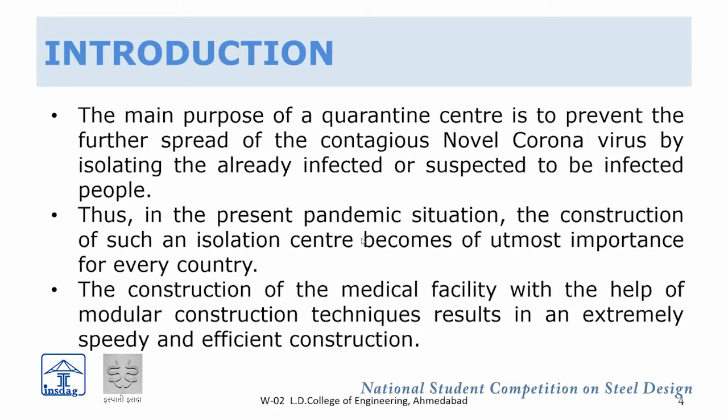As we know, the theme of this competition was given keeping in mind the pandemic that hit the world hard last year, which not only disrupted but took away the lives of lakhs of people throughout the world and brought the whole world to a complete shutdown for months. This urged all nations worldwide to design and construct quarantine as well as isolation centers in the least time possible, to prevent further spread of the novel coronavirus and to treat and isolate patients. Also, the construction of such medical facilities with modular construction practices helps in achieving construction speedily and rapidly.

The general requirements as per the guidelines issued to us by INSDAG were as follows: the location of the medical facility was to be at Kolkata, West Bengal, and the area of the facility was 50 meters by 35 meters.

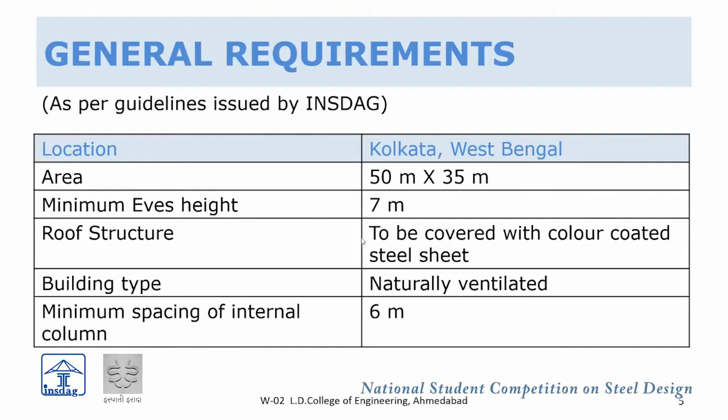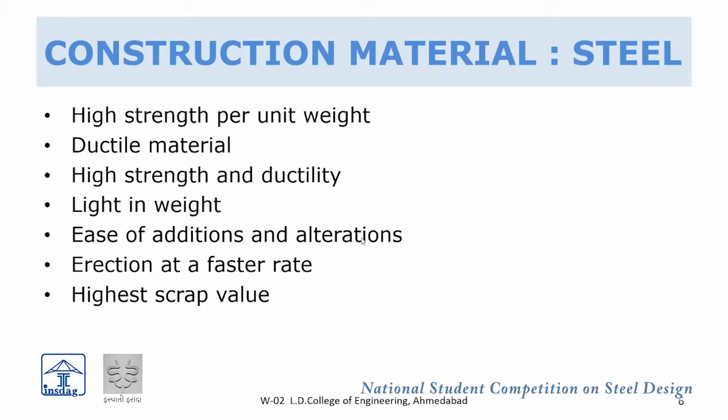As we know, steel can be advantageously used as a structural material because it has high strength for its unit weight, so even smaller sections with little self weight can resist heavy structural loads. Being a ductile material, its failure does not take place suddenly. The steel members being tough, they have high strength and high ductility. They are light in weight, so transportation, handling, and erection is easy, and additions and alterations can also be made easily. The steel also has the highest scrap value.

Prefabricated construction is a practice of assembling various components of a structure at the manufacturing site and then transporting those sub-assemblies to the construction job site. This helps in rapid and speedy construction because it eliminates on-site weather factors, contractor scheduling delays, as well as allowing faster fabrication since multiple fabricated structures can be produced simultaneously.

So now the further portion will be taken by Kishan Tripathi. Over to you, Kishan.

So we have used portal frames in our structure. They are commonly used in steel constructions, and we have designed it for the gravity loads and the lateral loads according to the Indian standards.

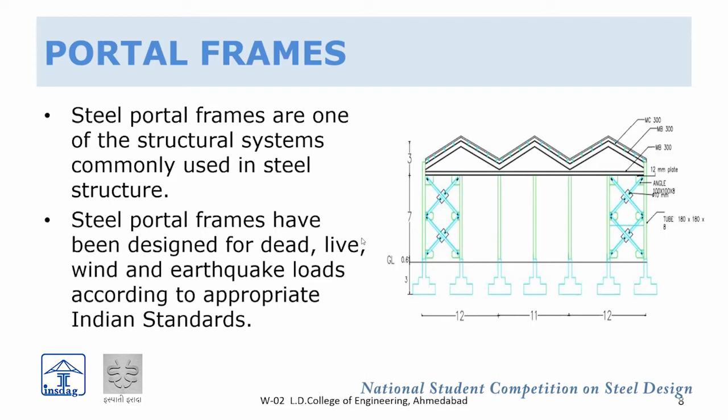The material we have used is E250B according to section 12 of IS 800 2007, and the sections used for the corresponding members are box sections for the columns, I sections, channel sections, and angle sections, with dimensions and codal provisions as follows.

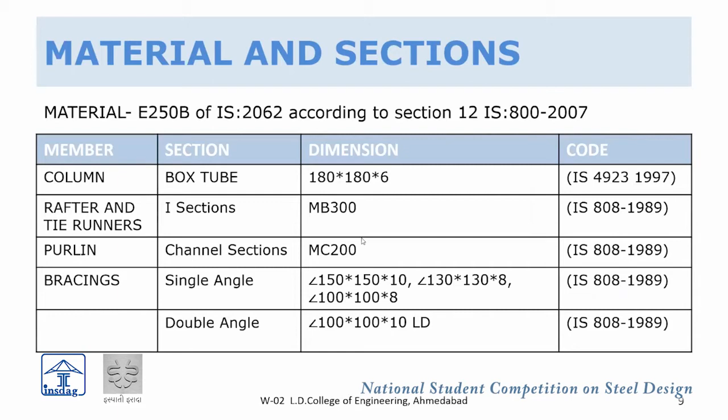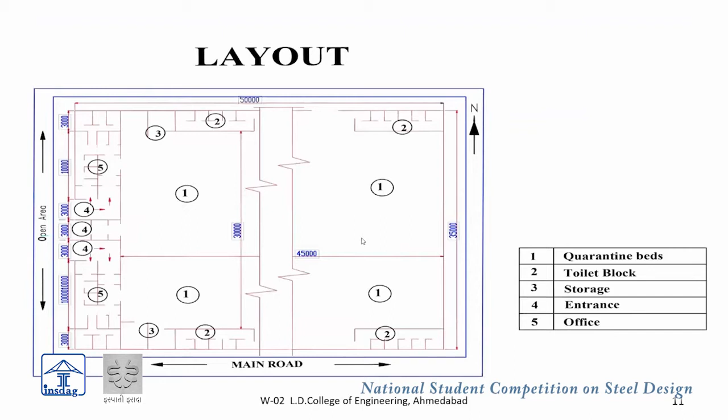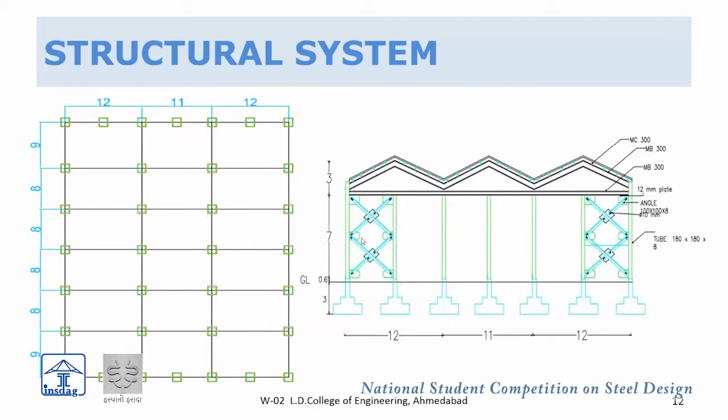So the proposed plan and structural system. This was the layout plan that INSDAG provided us, on which we had to provide our structural design, consisting of the quarantine area, toilet block, storage, entrance, and offices. On the left hand side is the layout of our column locations and spacings, and on the right hand side is the elevation showing the height and bracing systems of our structure.

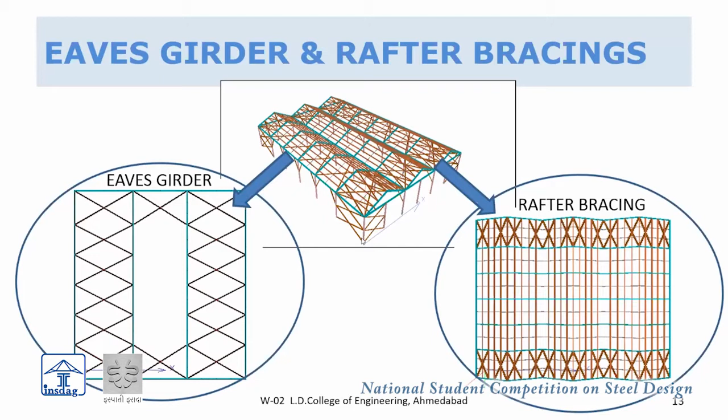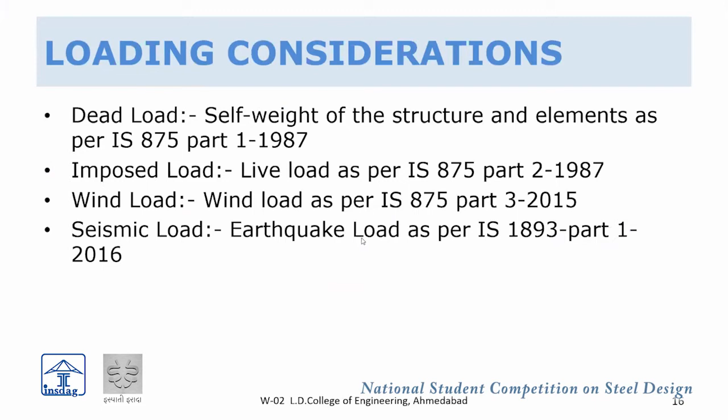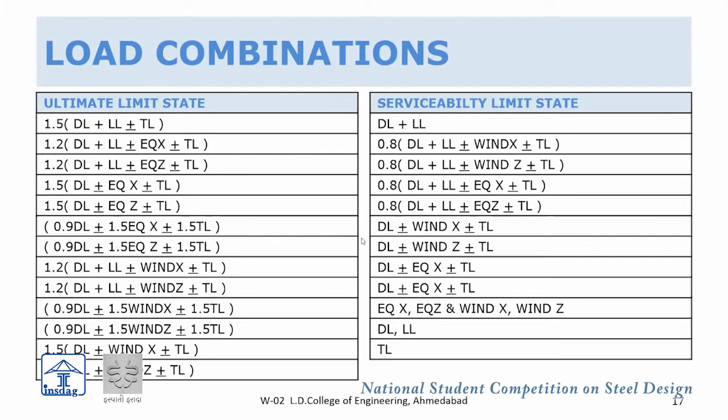For loading consideration of dead load, live load, and wind load, we referred to IS 875 parts 1, 2, and 3, and for seismic design we referred to IS 1893 2016. These are the load combinations we utilized for the ultimate state and serviceability criteria according to Indian standards.

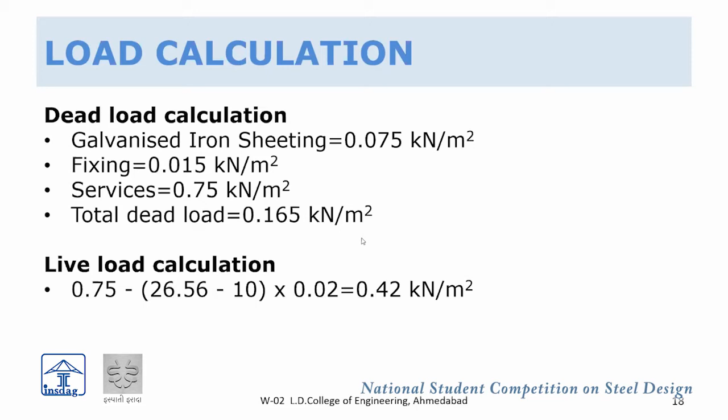The dead load calculated as per IS 875 Part 1, for the roofing, its fixtures, and the services provided, comes out to be 0.165 kilonewton per meter square, and the live load for sloped roofings comes out to be 0.42 kilonewton per meter square, according to Part 2 IS 875.

For the seismic load calculations, we have taken the zone factor for zone 3 of 0.16, response reduction factor of 5, and empirically calculated time period in x and y directions comes out to be 0.15 and 0.127. The mass and stiffness in the building are symmetrically distributed so as to have a coinciding mass and stiffness center, reducing torsional effects.

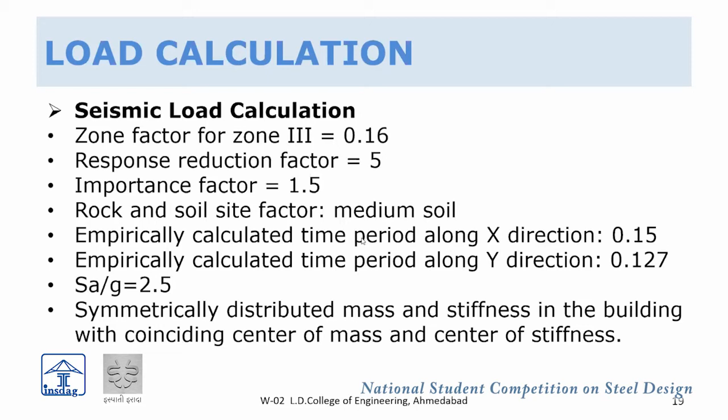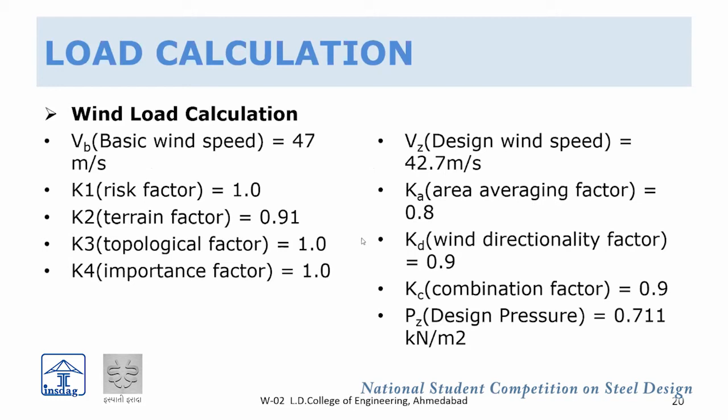The wind calculation is as per IS 875 Part 3 2015, and the design wind speed according to the different factors taken into consideration comes out to be 42.7 meter per second, with a design pressure of 0.711 kilonewton per meter square. So now we will move on to the design of critical members.

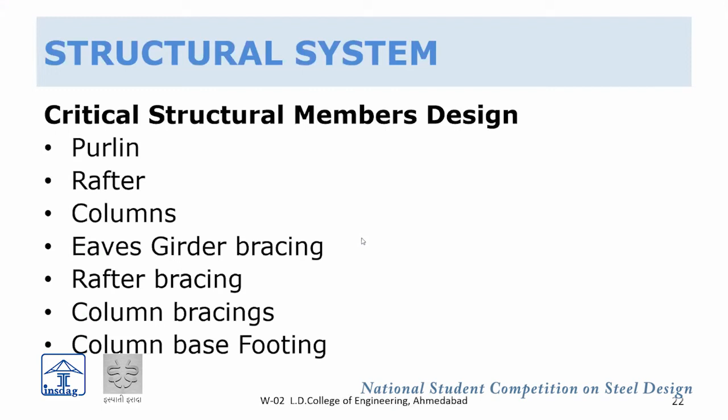The critical members that we have manually designed and taken into consideration are the purlins, rafters, columns, the bracing system, and the footings. The first load that comes onto this structure is through the purlins to the rafters, taking up the dead load, live load, and wind load from the roofings, all transferred to the purlin as a UDL.

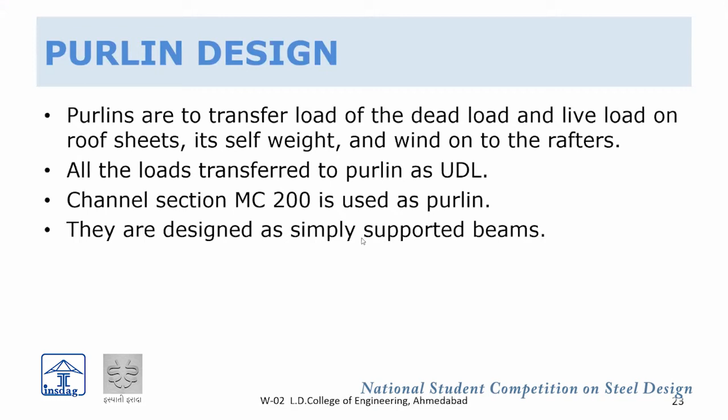The normally used channel sections as purlins, we have utilized MC200, designed as simply supported beams. For members subjected to flexure, we designed for bending moment and checked for shear, lateral torsional buckling, and deflection, with the most important part being the biaxial bending check. The span at the gable ends and the inner bays are as shown in the table, and for critical biaxial bending, we have provided sag rods.

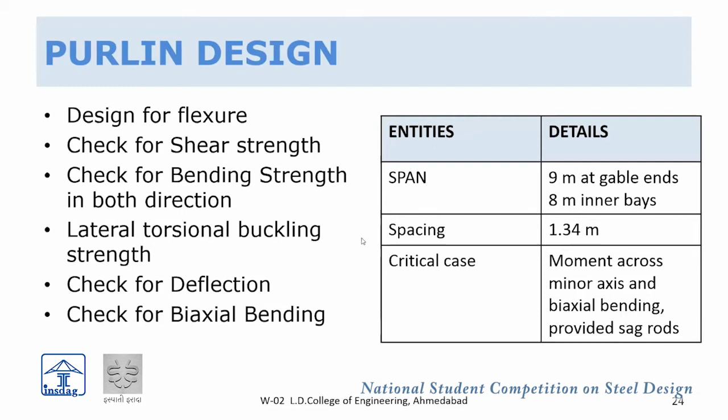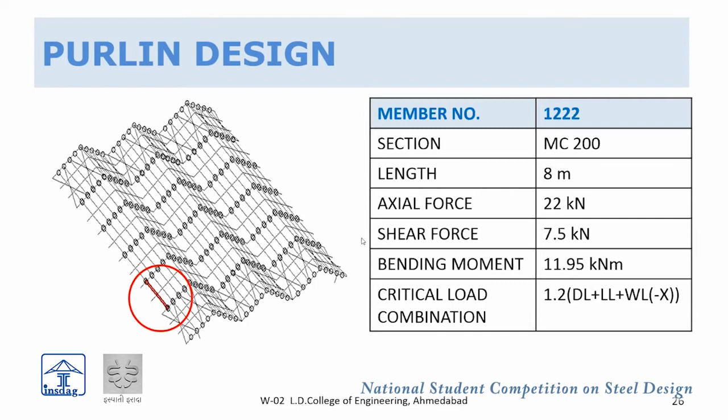Here it shows the purlins from the top view, in which this red circled is the critical member that we have designed. It is of 8 meter span, subjected to the following loads for the critical combination of wind, WL.

The rafters are the main flexural members, which transfer the load from the purlin to the columns. They are designed for the bending moment and checked for shear buckling, shear strength, shear lag effect, and deflections.

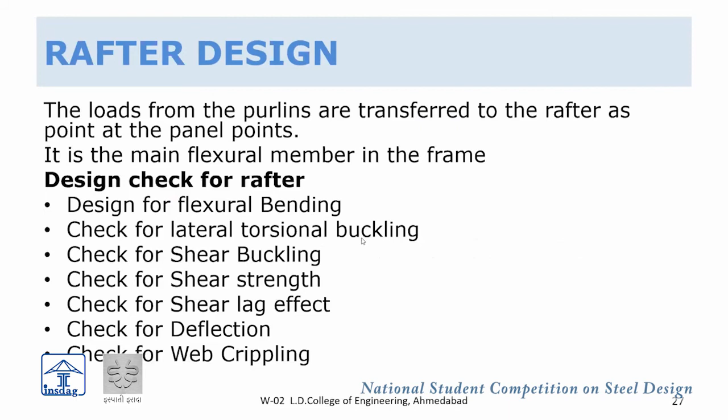Here in red we have shown the critical section of MB 300 that we have used, of length 6.71 meters, subjected to the following shear force and bending moment.

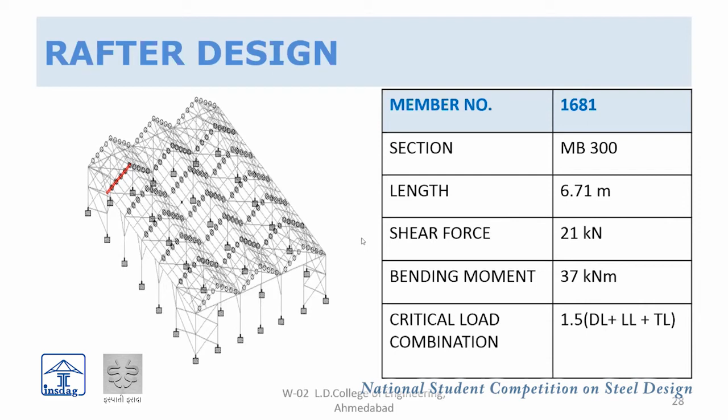Columns: we have used tube sections, designed for compression and bending, and checked for the combined effect of compressive and buckling bending.

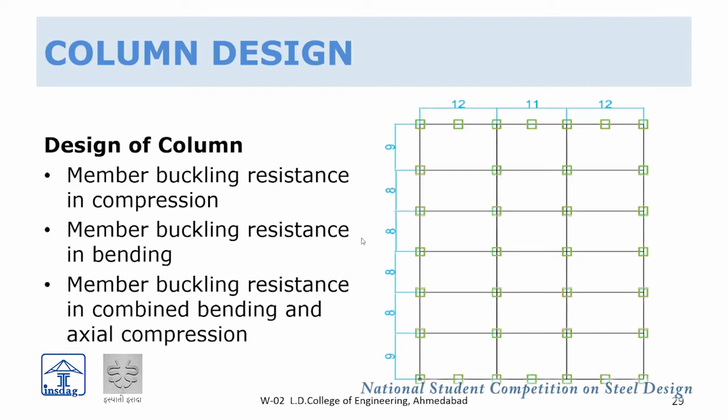Here is shown the critical column section that we have utilized, and these are its dimensions. It is 6.71 meter high, and the axial load turns out to be 203 kilonewton with a bending moment of 17 kilonewton meter.

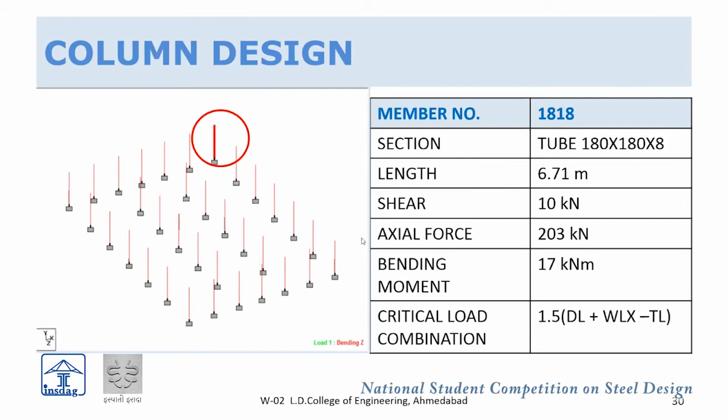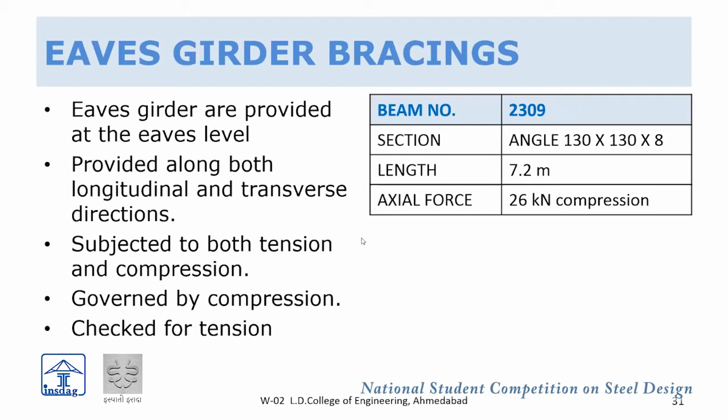We have provided bracing systems at different levels. At the eaves level, we have provided eaves girder in longitudinal and transverse directions both, using angle sections of 130mm x 130mm x 8mm, subjected to both tension and compression, but the design is governed by compression and checked for tension.

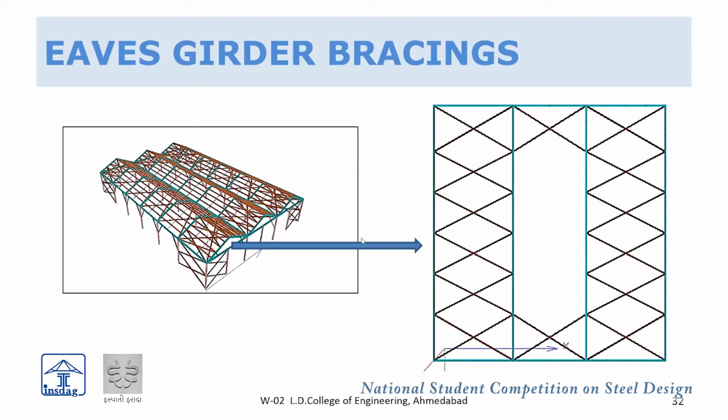Here is shown the bracing system provided at the eaves level from the top view, and in red is the critical member that we have designed.

We have also provided rafter bracings at the gable ends, governed by compression. The angles used are 110 x 110 x 8mm, with a compressive force of 52 kilonewton.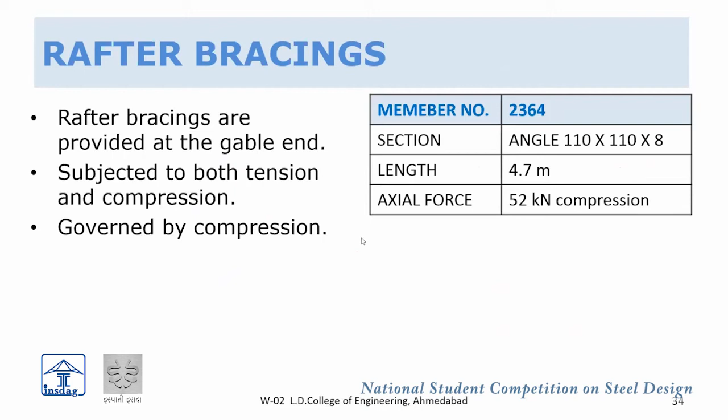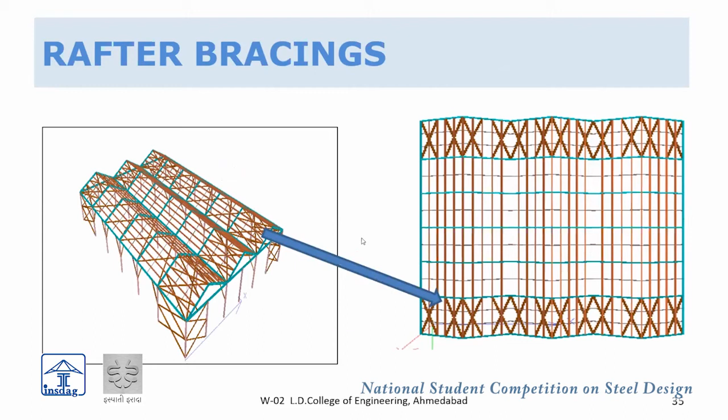Here is shown the X bracings that we have provided at the gable end on the rafters. The critical bracing that we have designed is shown in red.

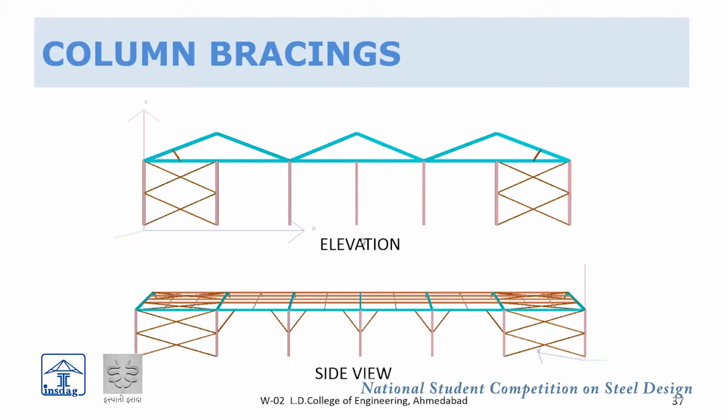These are the column bracings that we have provided in order to take up lateral loads and also reduce the unsupported length of the column members. The loaded members are checked for tension and designed for compression.

For compression member design, the buckling class, slenderness ratio, and area of the section are checked. Similarly, for the same member in tension, we check the provided area, and the rupture is checked by net section rupture and block shear failure.

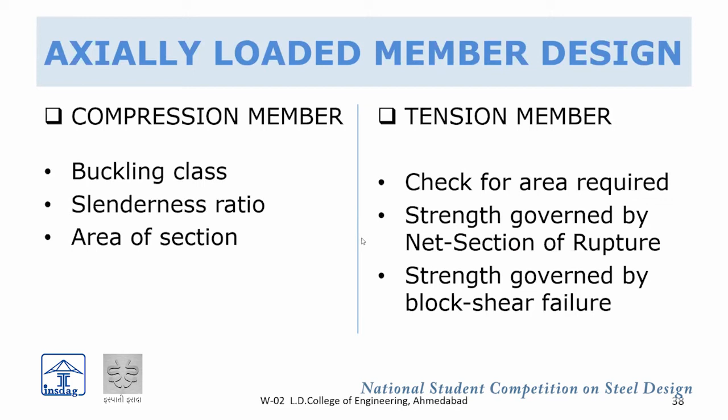For the footing, we have provided a gusseted base plate footing in which gusseted plates are utilized in order to reduce the thickness of the base plate.

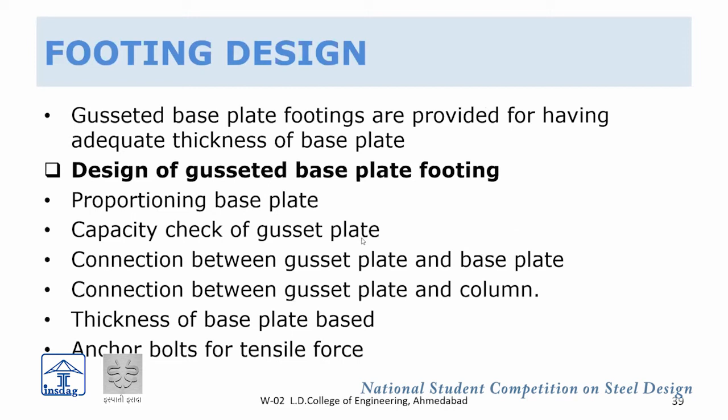First the proportioning of the plate is done and the capacity of the gusset plates are calculated. Then connections are provided, and anchor bolts are also designed for the tensile force, taking into consideration the bond capacity of the concrete.

In the RC design, we have designed the footing for one-way shear, two-way shear, and flexure, with reinforcement coming out to be 12mm dia at 200mm center to center in the X and Y directions both. The axial load comes out to be 245 kilonewton and bending moment of 98.6 kilonewton meter.

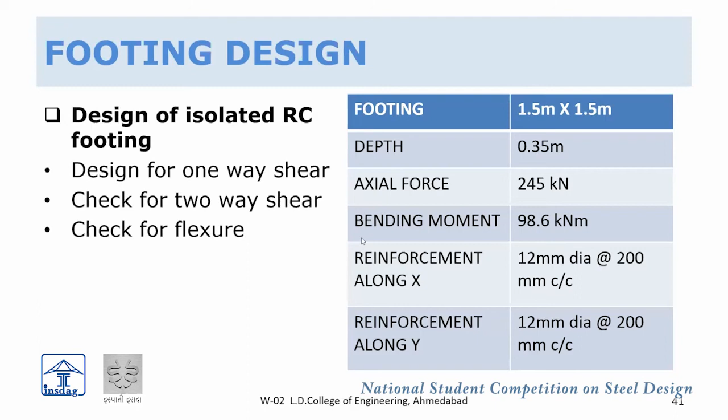Moving on to the design of connections. Connections are an integral part of a structure which transfer the load from one member to the other, and the forces transferred are compressive, tensile, shear forces, and bending moments.

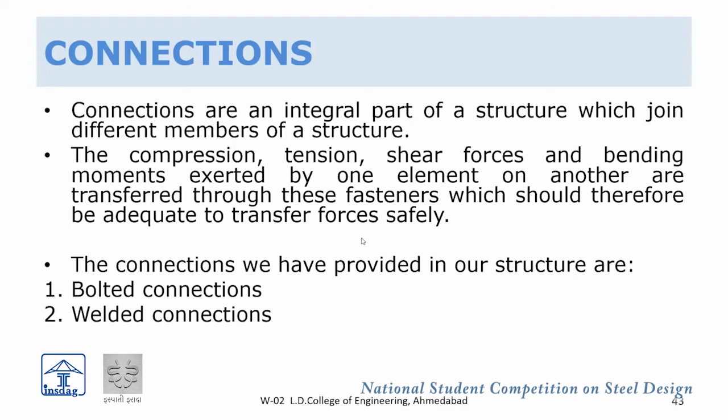We have utilized bolted connections and welded connections in our structure, and provided two types of connections: moment resistant connections and simple connections.

The moment resistant connections are provided at the rafter to column connections, rafter to rafter connections, and tied column connections. The bolts are subjected to tensile force and shear force, and are checked for the combined action of both.

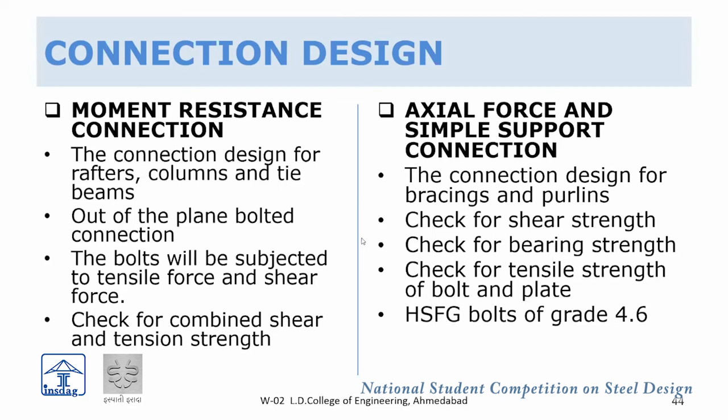The simply supported or axial force connections are based on the bolt value of the bolts, calculated for shear strength, bearing strength, and tensile strength. HSFG bolts of grade 4.6 are used.

Here are some of the connections which we have provided: this is the rafter to rafter connection, bolted connection, and rafter to column connection being shown.

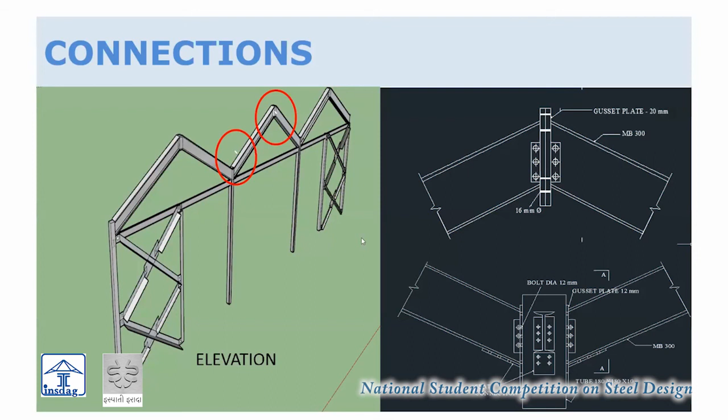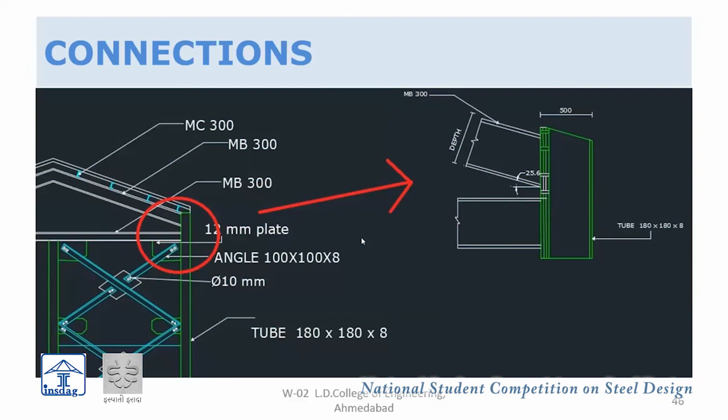Here the axial bracings and the rafter to column connection have been shown in detail. These are the bracing connections that we have provided, the axial connections.

And this is the purlin to rafter connection that we have provided.

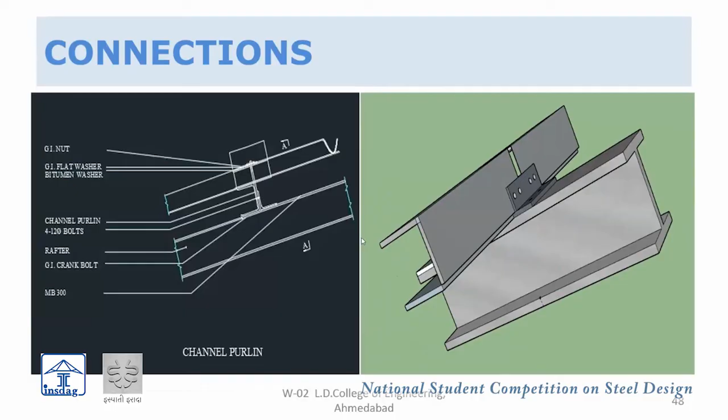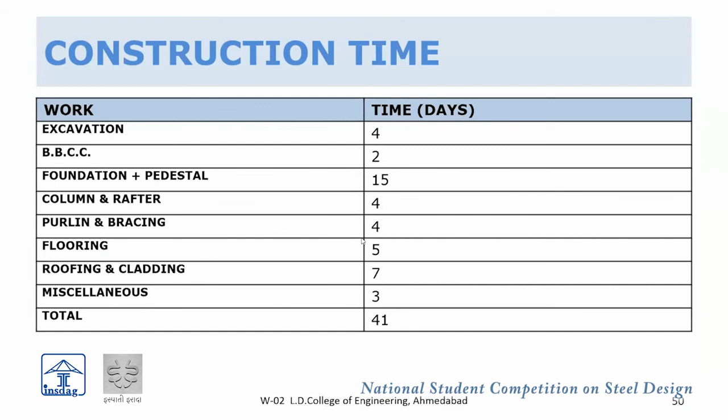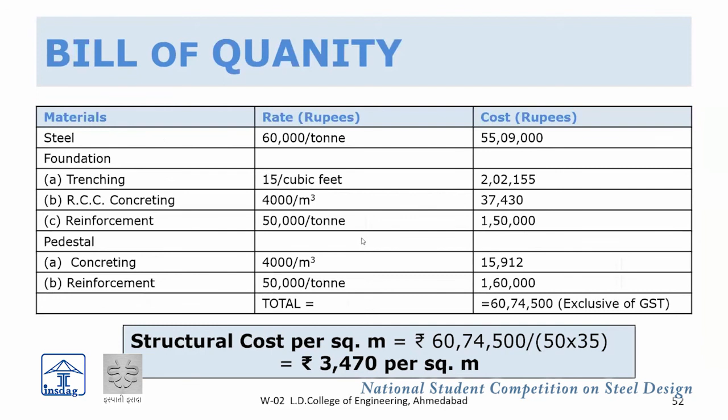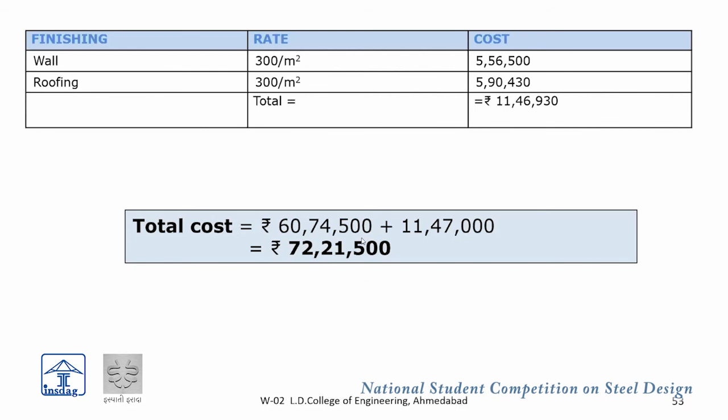The total cost of the project in structural material turns out to be 60,74,500, which is 3,470 per square meter, and the cost of finishings turns out to be 11,46,930. So the overall cost turns out to be 72,21,500.